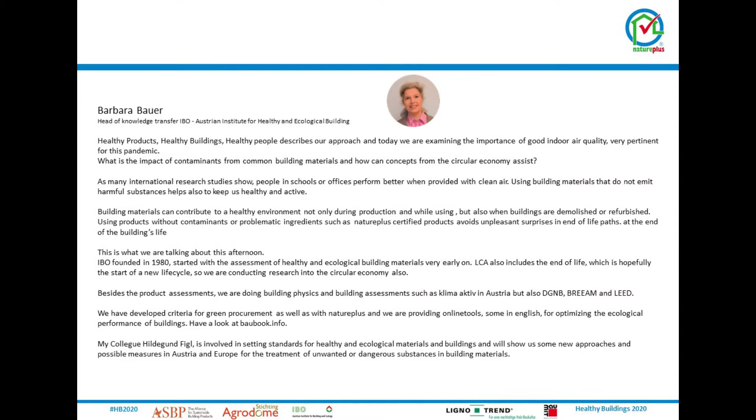Of course, we are not talking about healthy buildings in itself, but our connecting topic is contaminants and pollutants. There are a lot of topics or parameters which correspond to the aspect of healthy building in the same way as to the aspect of circular economy. What I won't be talking about today is the health impacts regarding pollutants and contaminants at the end of life of buildings, but I will look at contaminants and pollutants impairing recyclability of building materials.

My references for today are building assessment tools in Austria and Germany and ongoing research, corresponding research cooperation with the German BMI BBSR. The BBSR is the Federal Institute for Research on Building, and this is assigned to the BMI, the Federal Ministry of Interior.

They are running a criteria or building assessment tool called BNB, Assessment System for Sustainable Building, Bewertungssystem Nachhaltig Bauen. Therein there is a criteria profile called BNB 4.1.4, and this criteria profile aims to optimize buildings in the design process so that they are optimally prepared for dismantling, separation and recycling, and it will leave behind as little waste as possible. We have a similar assessment system in the Austrian system called end-of-life indicator. In this research cooperation, we try to redesign this criteria profile with the experiences we have in Austria, and with a lot of research work and interviews.

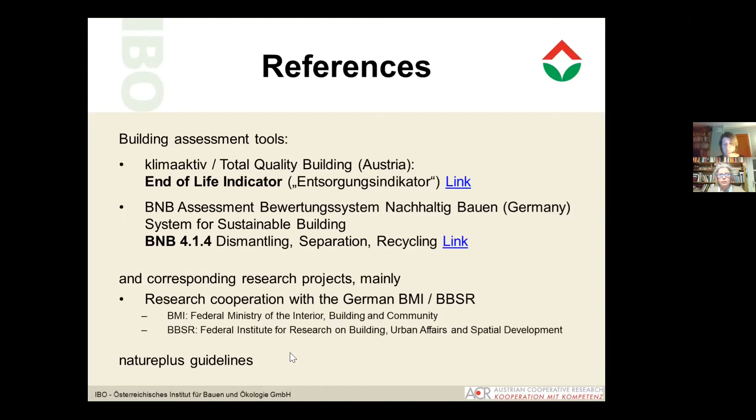So today's focus is, I want to give... sorry, I'm a bit busy because I'm host now and there are people coming, but it's nice that they are here and I have to let them in.

So today's focus is: I want to start with a definition of contaminants and pollutants. Then I want to go into more detail of how contaminants impair the recovery of materials, then how pollutants impair the recovery of materials. Then I would like to present the classification matrix we developed for end-of-life routes, and then give you a short insight into the next steps IBO and natureplus are planning to do.

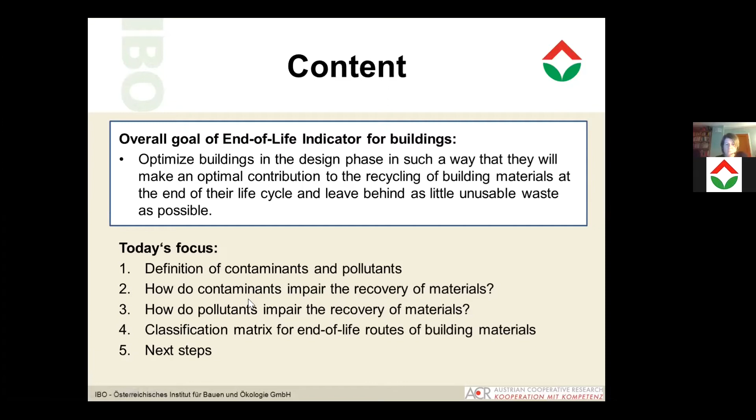The basic approach of all these end-of-life assessment schemes in various building assessment tools, not only in Austria and Germany, is that they start to apply deconstruction scenarios on building elements. Usually these building elements are deconstructed virtually, depending on the joint techniques between the various layers. Are the different layers separable from each other or not? How much effort does it take to separate the layers from each other? Depending on this, we will have different waste fractions with different contaminants from adjacent layers.

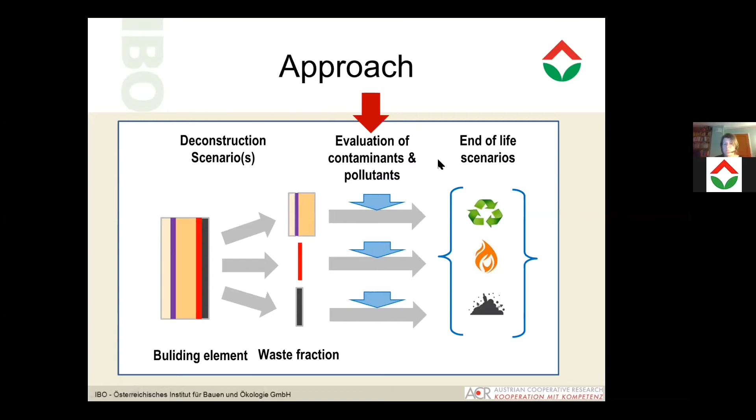In the next steps we look at these contaminants and pollutants of the waste fractions and try to evaluate them, and this will be the focus of the talk today. These contaminants and pollutants are assessed and evaluated according to various end-of-life scenarios or end-of-life routes.

In principle, we have not so many possibilities in end-of-life. The waste law starts with avoidance of waste. That's something very complicated, if not even impossible, on product level, to avoid a product. So we don't focus on that now, but start with the second priority of the waste law: reuse and further use.

In our assessment tools, we don't distinguish between reuse and further use, since reuse or further use at all is, at least in the German-speaking countries, something very seldom done in today's recycling and disposal practice. It's maybe more usual in the Netherlands, as far as I know, or Belgium, but not so in the German-speaking countries. Reuse and further use is something a bit special, because usually the reused product or element doesn't reach waste status—it's still in product status. So the waste law also calls this preparation for reuse, not just reuse.

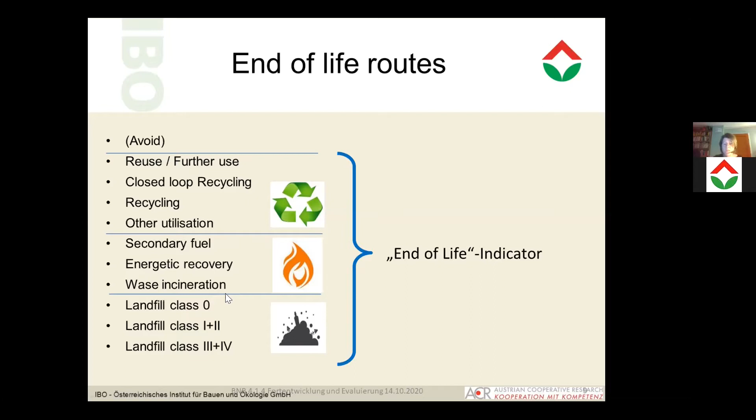In principle, except for reuse, we have 3 possible end-of-life routes: recycling, incineration, or landfilling. Within these principal routes, we define some classes, always starting with the top class—I will come to that later on. So, to our topic: contaminants and pollutants.

In German, we call these contaminants Störstoffe and pollutants Schadstoffe. I'm not 100% sure if the term contaminant means exactly the usual term in English. But what is meant by contaminants are residues from adjacent layers, so not from the building material itself, but from adjacent layers that can impair reuse, recycling, or thermal recovery.

Examples for contaminants are gypsum-based plaster on concrete. This gypsum-based plaster impairs the recycling of concrete to aggregates for new concrete or for road layers. It has to be removed before recycling, and the effort is quite high to get rid of this gypsum contamination. Another example is coatings on wood-based materials that could impair recycling, and it could be forbidden to recycle wood-based materials if the coating contains heavy metals.

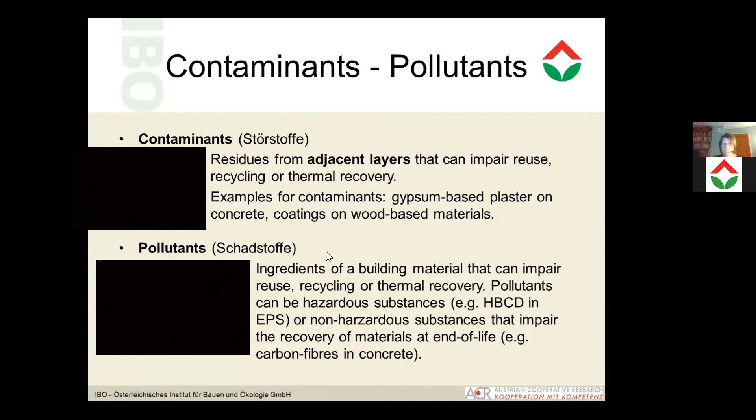To look at how contaminants from adjacent layers can impair recycling, I give you the example of concrete. My colleagues in Germany made a lot of interviews with disposal companies, and asked them how they deal with typical adjacent layers on concrete, which layer is problematic, which is not so problematic. In the end, the carbon fibers we just talked about were the most problematic thing we found in our research work. Of course, that's a pollutant, not a contaminant.

Regarding contaminants, we found some which are not so problematic according to the disposal enterprises, like small amounts of bitumen primer, or small amounts of gypsum plaster filler, just a very thin coating on the concrete, or other small coatings. In these cases, the disposal enterprises don't make too much effort to separate these adjacent layers or contaminants, but recycle them all together with the concrete.

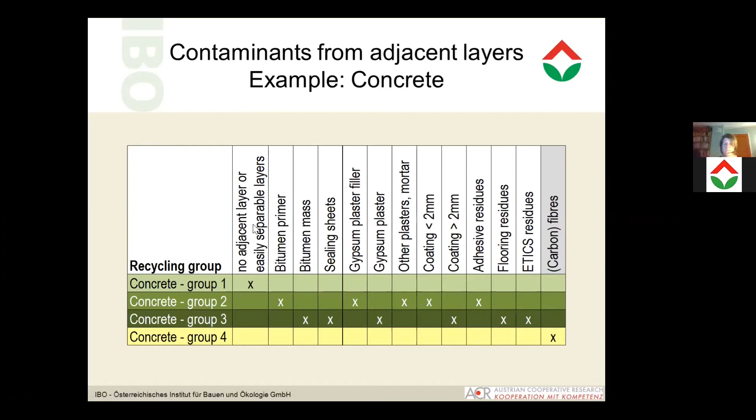As I've mentioned already, strategies against contaminants are really difficult on product level since they require design strategies instead. So, avoid or replace non-separable adjacent layers - for example, use loosely laid sheets instead of glued sheets, or replace interfering adjacent layers, such as gypsum plaster on concrete, or search for better available technology for the same function, like best-case building elements.

What we can do on product level, either on the manufacturer side or natureplus or consultant side, is give recommendations for best-case building elements - how a product can be used in construction, which joining techniques are dismountable and recommended so it can be dismantled easily. We can give information about substances from adjacent materials that would impair or not impair recycling, recommendations on replacing interfering adjacent layers, and information about dismantling, take-back, and recycling concepts depending on adjacent layers.

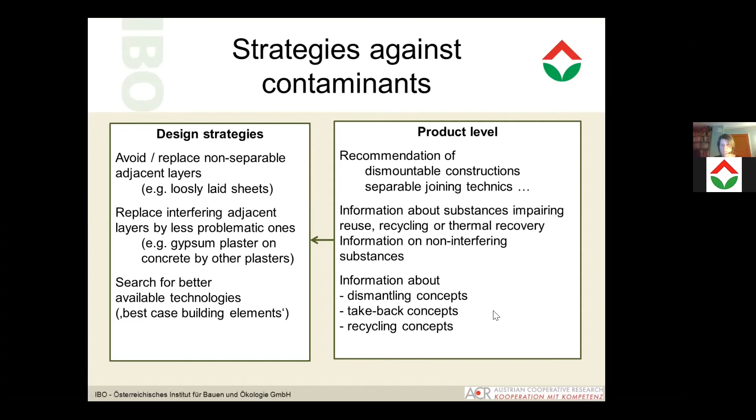This was the topic of contaminants. Now we're looking at something we also have to deal with directly in natureplus: pollutants. We'll separate this topic into two aspects - pollutants in recycling and pollutants in incineration.

Pollutants in incineration is a bit easier because in principle the parameters are more or less the same, independent of where this waste or fuel can be burned. What you can see here is the limit values of various incineration plants according to the Austrian incineration regulation, the Abfallverbrennungsverordnung.

What you can see here are different parameters: heavy metals, sulfur, halogenic compounds with chlorine in particular regulated, and other contaminants. You can see there are various limit values depending on where the fuel or secondary fuel is burned.

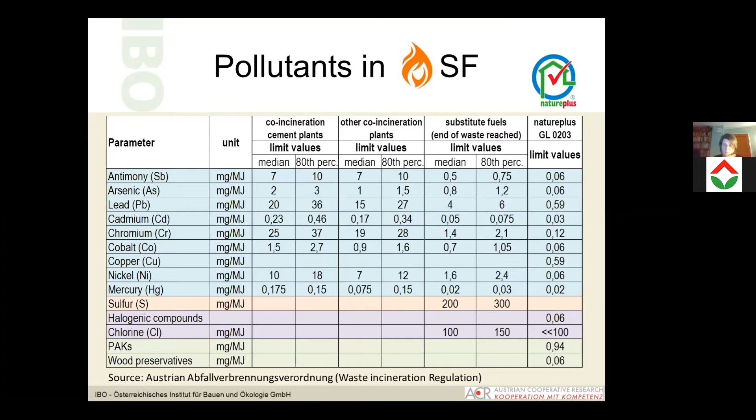We measure more parameters than is required by the incineration regulation, and we are far beyond those requirements. So pollutants together with natureplus products will always be lower - but what could be contaminants has to be regulated at the design stage.

For our end-of-life indicator, we combined the list from the waste law - German and Austrian ones - with eco-labels, combining pollutants and contaminants, possible pollutants and contaminants, and made this list of parameters where we added, for example, bromine and fluorine to the list, which is not required just by law.

Just only looking at chlorine - we added some important contaminants which should be regarded at the end of life of building materials, and we defined limit values for them. I won't show you them in detail now because they're still in discussion, especially with industry.

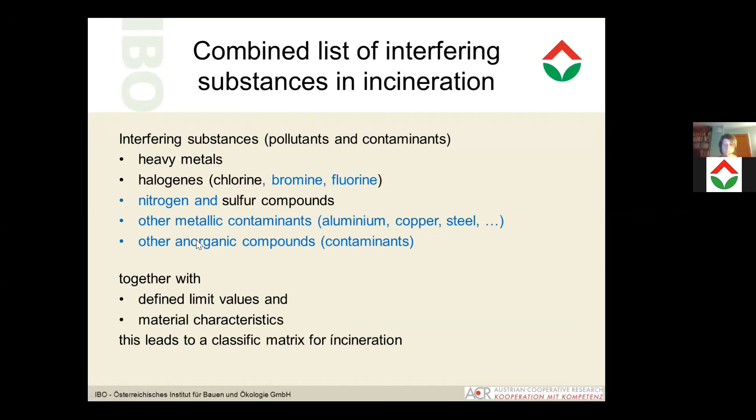Together with material characteristics, this leads to a classification matrix for incineration. These material characteristics are the main characteristics defining energy content: heating value and bulk density. If both are high, that's the best grade for incineration.

If heating value is high but bulk density is low, we define the medium class - an example is insulation materials. As you might know, the heating value of polystyrene is very high, more than 40 megajoules per kilogram, but the bulk density is so low that the energy content of the material you put in your oven is not that high, rather low to medium, so you don't get so much energy out of a PS insulation panel, for example.

The low class is, of course, if the heating value is also low. And in these classes we have various subclasses depending on the pollutant or contaminant content. Very pure materials get the highest grades - these are substitute fuels, and end-of-waste status could be reached. Then depending on how many problematic pollutants are inside the material, the grade goes down and down.

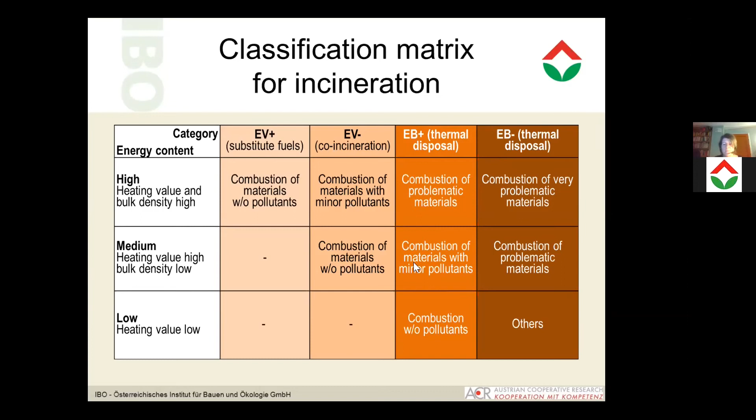Yes, that was pollutants in regard to incineration. The second thing is pollutants in regard to recycling. That's a bit more complicated because we have various recycling requirements depending on the building material. So you have other recycling requirements for concrete, for waste, for wood, for polystyrene, for steel, or whatever. We have various parameter lists depending on which building material we're looking at.

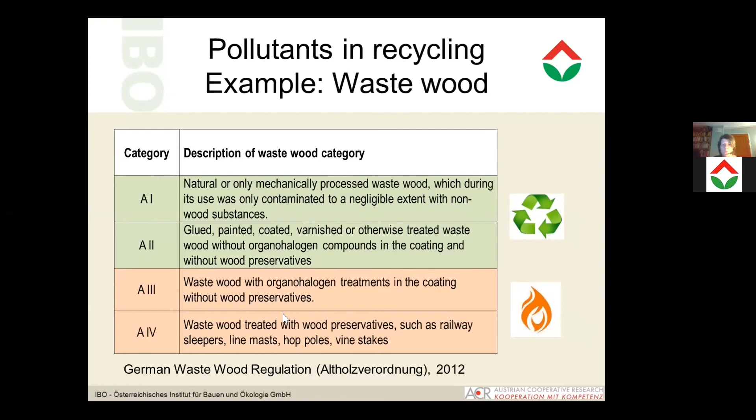I would like to give you an example on wastewood, and we did a lot of research work on the most important building materials and the requirements they have for recycling. So regarding wastewood, we have in Germany the wastewood regulation, Altholzverordnung, which defines some categories of wastewood, from naturally wastewood to wood treated with wood preservatives, and only the first two classes, naturally or slightly treated wastewood, may be recycled, and the other ones have to be burned.

And for recycling of wastewood, the German Altholzverordnung wastewood regulation again gives some limit values, which are now significantly lower than what we've seen for incineration plants. Logic, I think.

And again, if we compare this with the natureplus limit values for particle boards, for example, then we will see that the limit values for a lot of pollutants are much, much lower in natureplus, and some are also lower, not so tremendously, but all limit values of natureplus are lower than, for example, these limit values of the wastewood regulation. So again, we can assume that natureplus products will also meet the requirements for various end-of-waste regulations for various materials.

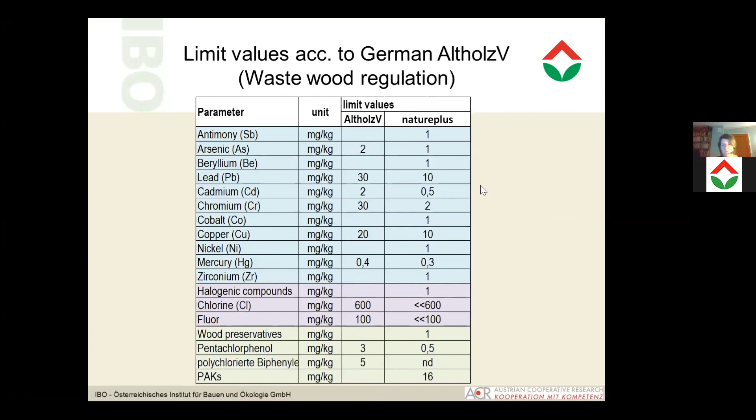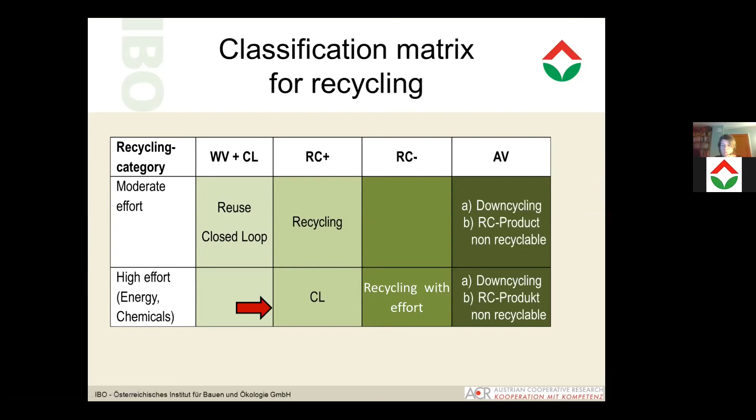Yeah, this classification is done according to the pollutants and contaminants in the building materials, or the virtual building material waste, and also, of course, according to the recycling technology or the recycling processes which are known for the product.

And if we today, in the design stage of a building or design of products, look at the state of practice on the possibilities for recyclability, we always look at the state of practice and technology. And the state of practice and technology in regard to recycling technology in particular is very much dependent on building materials which were used in the past, past 50, 100 years, let's say. So disposal companies have experience with these materials, but they have no idea how to deal with today's materials, or some of today's materials. Let it be the carbon fiber concrete, let it be the bricks with infilled insulation materials, because they had no reason until now to develop equipment.

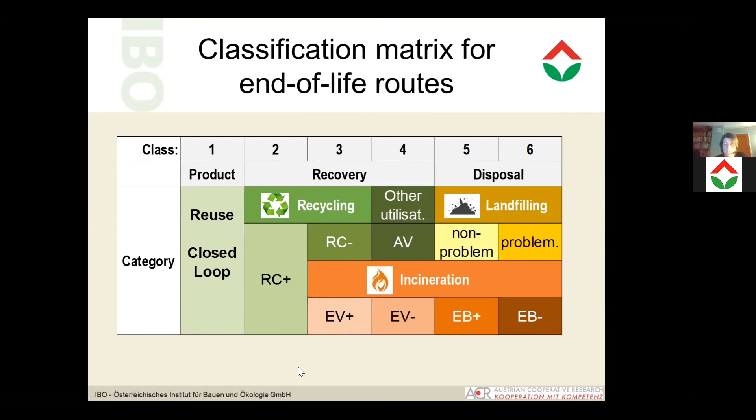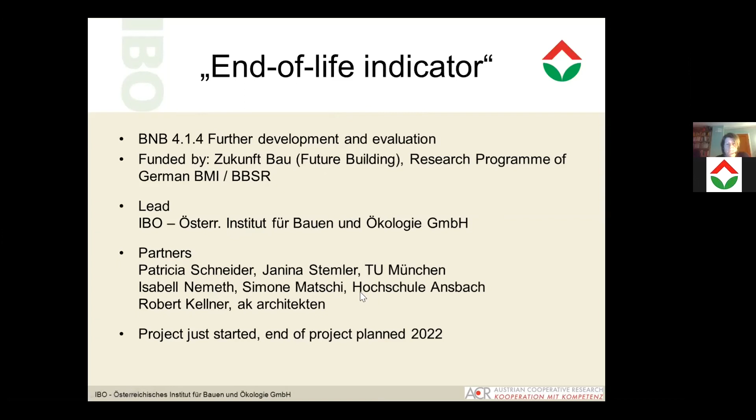To end, I wanted to show you the next steps. First, this end-of-life indicator is part of a project funded by Zukunft Bau, the German Ministry's Future Building program. This project just started; we have partners from TU München and Hochschule Ansbach, who have been researching with us for many years. Based on this classification matrix, we want to build up a whole system for assessing whole buildings.

We have various ideas how to do this, and we are now evaluating them, how it works in practice and on building level. We will build up various tools around this assessment system, with a material database.

I've seen IBO raised their hand. Okay, but maybe this was okay. I had a sign from Zoom. Sorry.

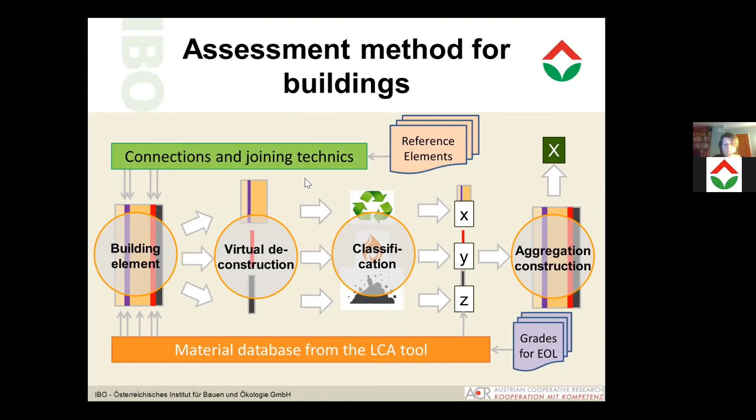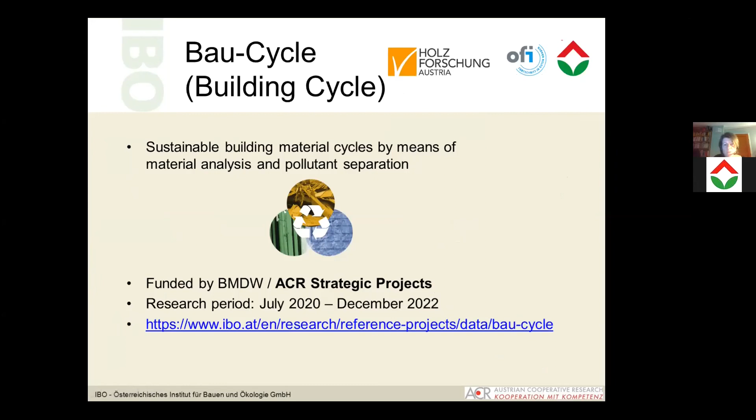That's what we are doing here. Then another project is Building Cycle, together with Holzforschung and OFI. Holzforschung is the lead; it's an ACR strategic project, Austrian Cooperative Research. We are a network of non-university research institutes.

There we want to build up an analysis laboratory to determine pollutants from buildings that should be dismantled. We want to make, on-site or in laboratory, very quick analysis on pollutants of critical building materials, and find a way for additional discharge of pollutants.

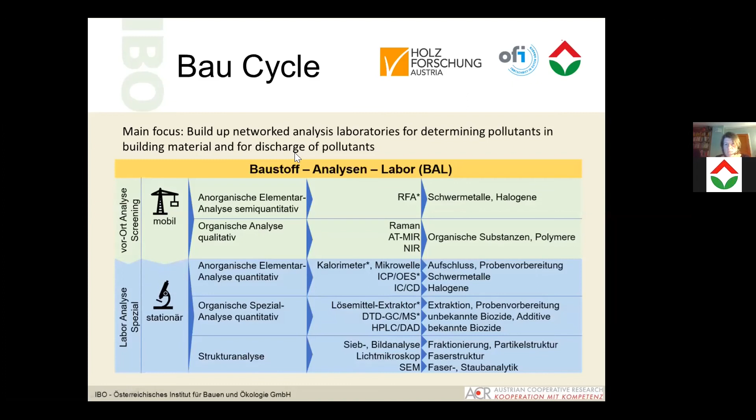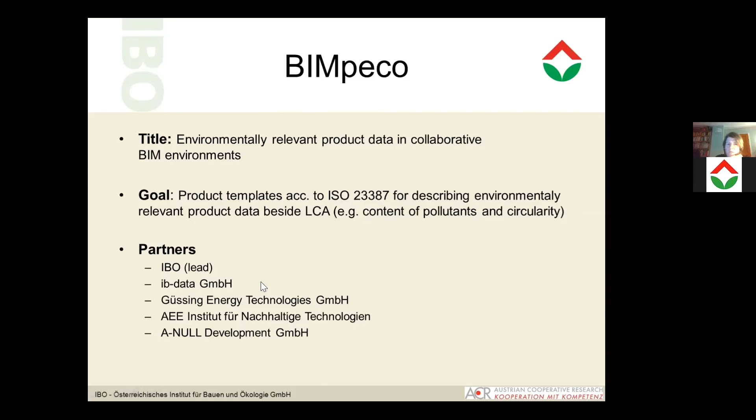Another project is BIMpeco, where we want to make product templates according to the BIM standard, describing environmental aspects such as content of pollutants and circularity. This shall be integrated into our database, Baubook, so that we have this content inside Baubook. We have no BIM connection yet, so we will apply this standard.

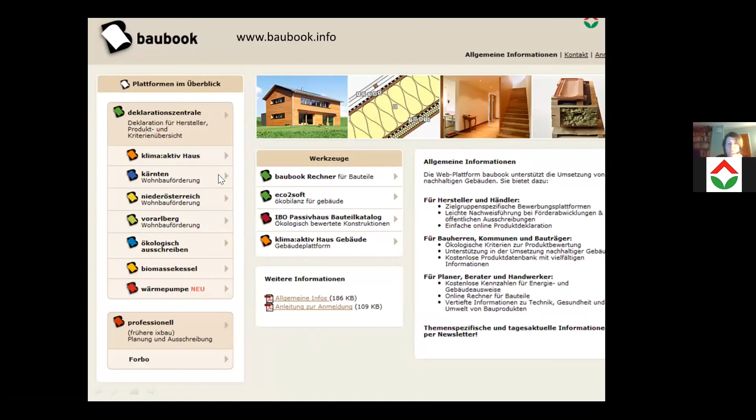Finally, in natureplus, and with that I want to end my speech: in the natureplus Criteria Commission, we plan a new guideline, still a working title, for assessing the circularity of building materials. Based on the various webinars we had in the last month, we are now forming a working group, and we'll start with the first drafts hopefully next year.

So sorry that I've talked so long, but thank you for your attendance, and please give me your questions.

So, Conny, thank you very much for showing us these rather difficult approaches, which seem necessary to move forward in this endless discussion. As we have no questions in the chat, I will ask one myself, but I want to invite you, dear participants, to ask if you have questions on these approaches. My question to you, Conny: are you optimistic that we will get rid of these contaminants and pollutants, that they will disappear from the building industry, from the building sector, very soon, or how long will it take? What do you think?

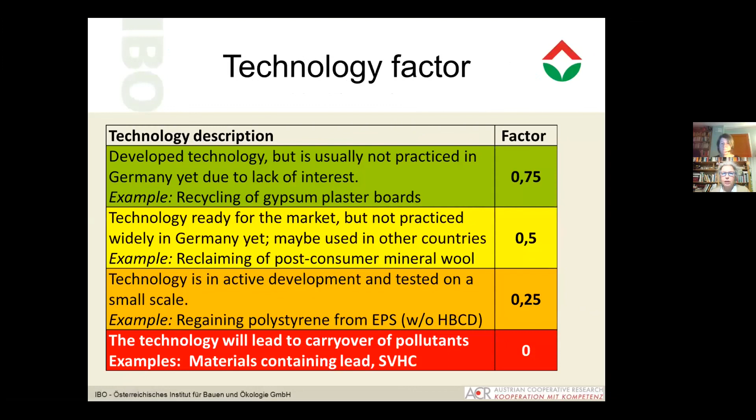A technical question, referring to the slide, state of practice in technology. So you mentioned that companies don't know how to recycle bricks filled with mineral wool or polystyrene, but not the recyclability of standard facade insulation, namely bricks, concrete plus polystyrene boards, also with the Verbundsystem. I know the complaints, but I think they lack evidence. Do you know any study that proves that the first is harder to recycle than the second one?

Yeah, I'm convinced that the first is better to recycle than the second one. I'm convinced on that. But the feedback we got in our interviews of the disposal companies was that they don't have the equipment now, because they never had the question to separate this brick with the infilled insulation materials. But it's logical, I cannot imagine that there is no technology available to separate these two things. But now they don't have it, and so it's a problem for them.

But I think it's the right way to go, and not to stick to what is the technology today, but to look on what is possible and what should be possible with the simple Hausverstand - house brain.